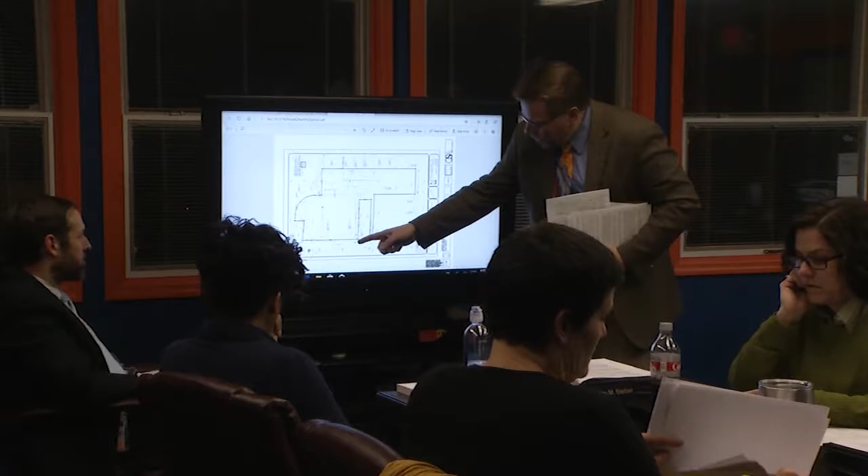Your property not only goes along Ewing Street, it comes up here between the gym and Tony Scholar's property, and that big tree is on your property. I'm sorry, it's yours. And these other trees are on yours too. This is the fence line here.

So the fence extends from Tony's yard beyond into your property, because your property jogs down here and then back up.

He did that years ago when that was a brush pile and wasn't being maintained. He fenced it so he could make sure he'd just mow it when he was mowing. He knows that that's not his property. That's actually the area that floods when water runs off your lot. So he can't use it for much anyway.

That's a low spot. The alley that runs between Scholars and McClovick's. Right now, every indication is that belongs to the school board. Wow. Okay?

It looks like this fence right here. David's fence is just a little bit over the property line, but it's a rectangular fence with 90-degree corners. It's very minor. Right now, there's a lot of growth along here anyway.

That's about where we expected it to be, but as you're running back along the east side, all of the properties over here, most of them, their deeds say they're 100 feet deep, which puts their backyards right along that line. But your property line, according to your deed, is here. That creates a no man's land that nobody's quite sure if it's owned by anyone.

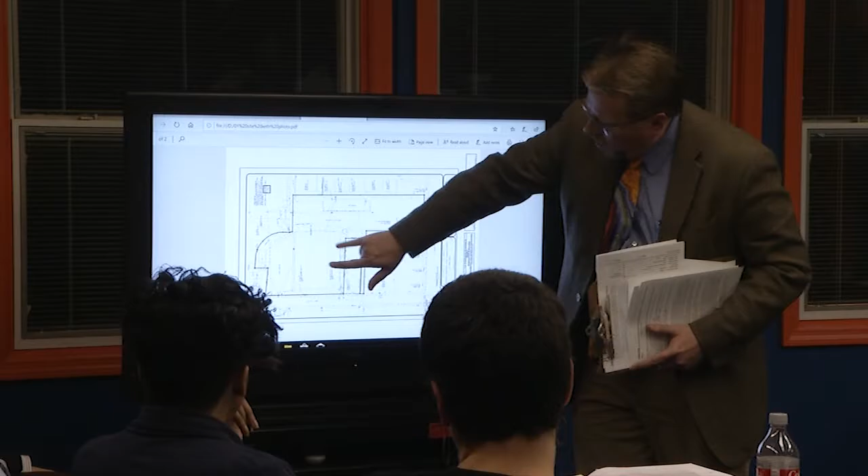Welcome to historic South Frankfort. Originally, 3rd Street ran through here and would have connected to where Ewing Court is now. This was 2 lots facing 3rd Street. There's a lot of history that Harry had to read through a lot of documents to piece this together.

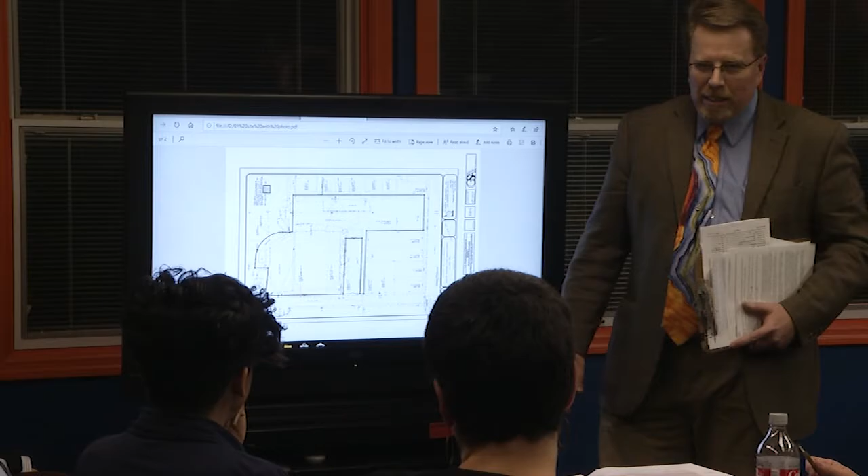Right now, we believe this is your property. You will see multiple fences coming out onto your property. We can clean some of that up if we have the money to do all of the site development, which I'm hoping we can tweak in here. But you'll also see this is the fence at the back of your bus lot, right there. Your property line is back here. So if you want to keep that as a wild green wall that helps separate your buses from your neighbors, that's fine, but you need to know that it's your wild green wall, okay?

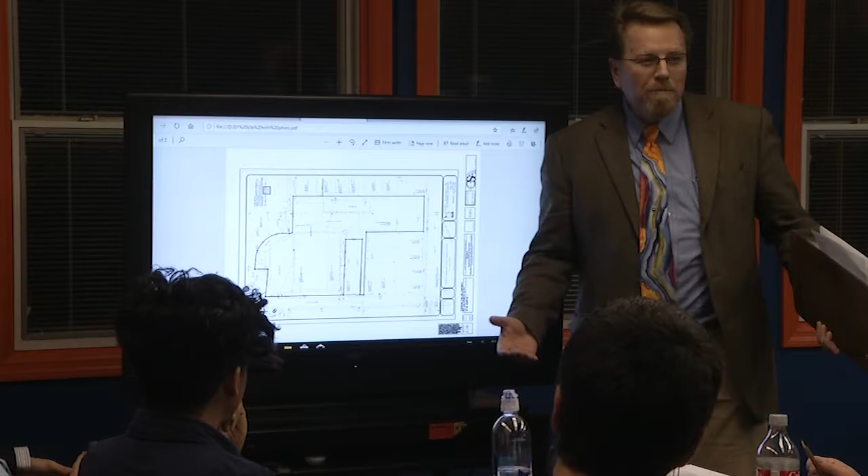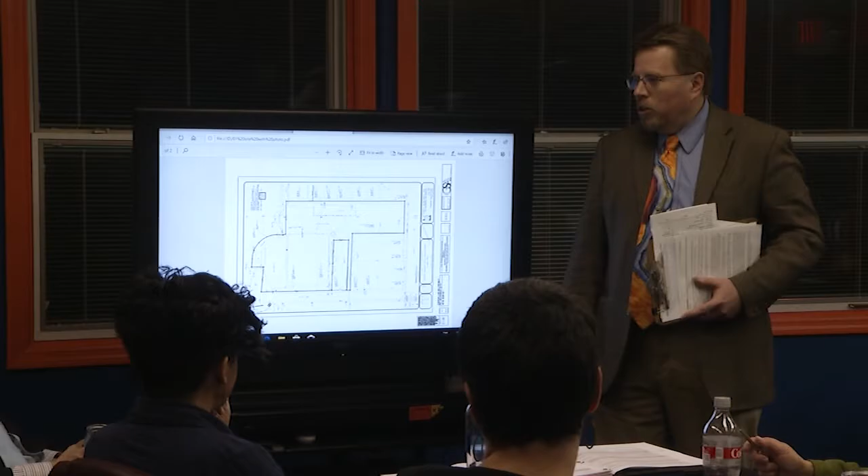Now you can know that. Before, I don't know that anybody knew where your property lines were. It's really hard to know what property to maintain when you don't know you own it. I don't think you're going to have any trouble. Your neighbors are going to keep maintaining this as they have for the last however many decades, and they're going to keep parking there. That's okay, except on game night - you can kick them out.

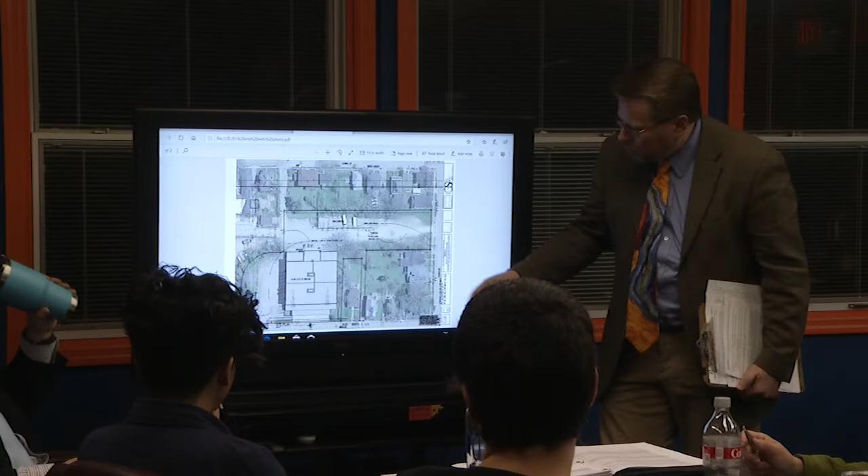Okay, so can you slide to the next photo just for a second? This makes that a little bit clearer. I overlaid it with a Google Earth image just so you can start to see - the property line doesn't show where the houses are for each of those properties. You can see Dave Stumbo's house is pretty close to this line. Of course, Tony's and Greg's houses are right there on the line.

This house is fairly close, but you've got large backyards here. That's what makes this a better space to park your buses - you're not starting them up at 4 a.m. on a winter day right next to somebody's bedroom window. And that's also one good argument for having your kind of green wall there. It gives some privacy to those folks.

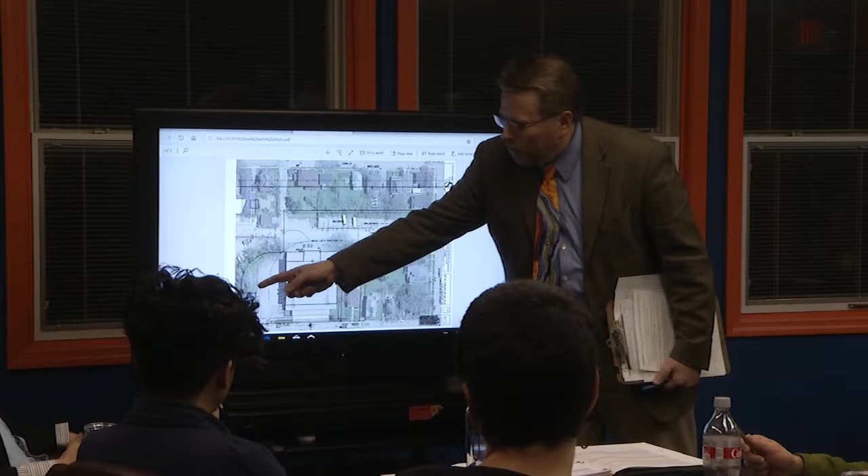Okay, and yes, this really is an odd curve that comes around through here to catch - was that the old music building at one point? I've heard it called Frisky, I've heard it called many things. And of course, this is Whitehead Hancock's property, and this is the city's property with the pump house. So that kind of gives you a quick overlay of what we've discovered.

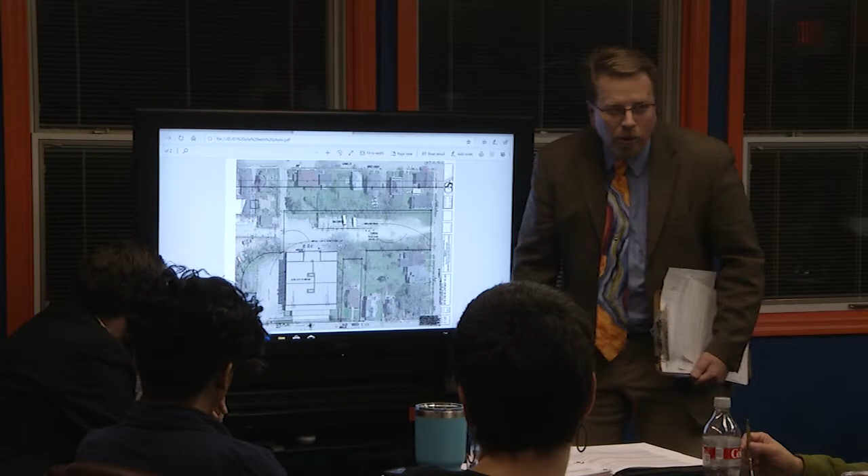I'm not sure what that line is for. I do know we dug up a manhole here that was completely buried in asphalt - that's the one that we found. It looks like all of the sewers on this side of the building are coming out to a manhole here, and the restrooms on this side are coming out to a manhole there. But there is also a sewer line that runs back here, downhill away from the building.

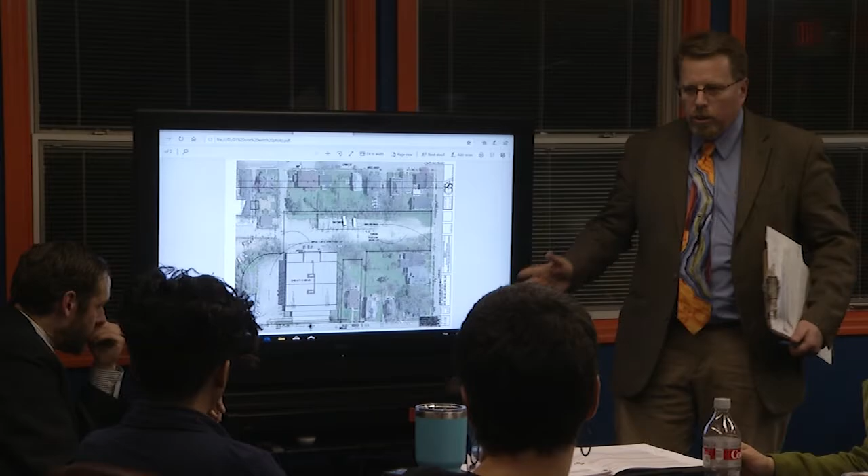So it's fun, and now we know where the storm sewers are in your back parking lot and have those located as well. We got out there one day with - trying to think who we were out there with - we were out there with Mr. Hancock and his crew, and walked around and looked at what work they'd done there in the last 2 decades.

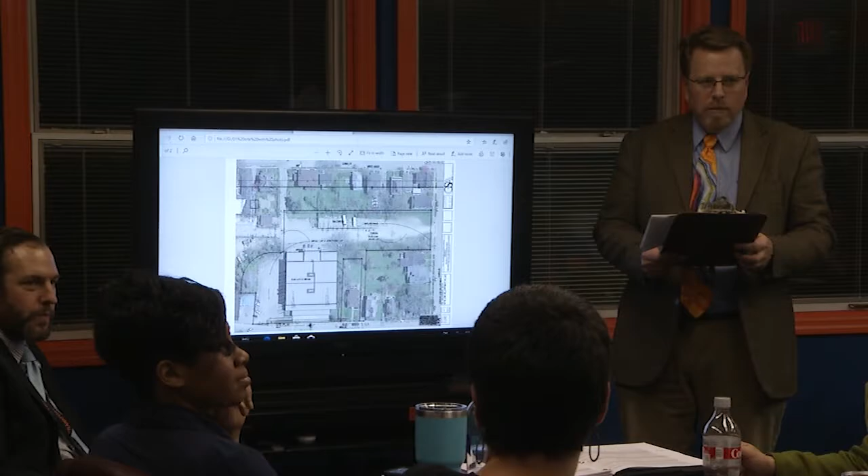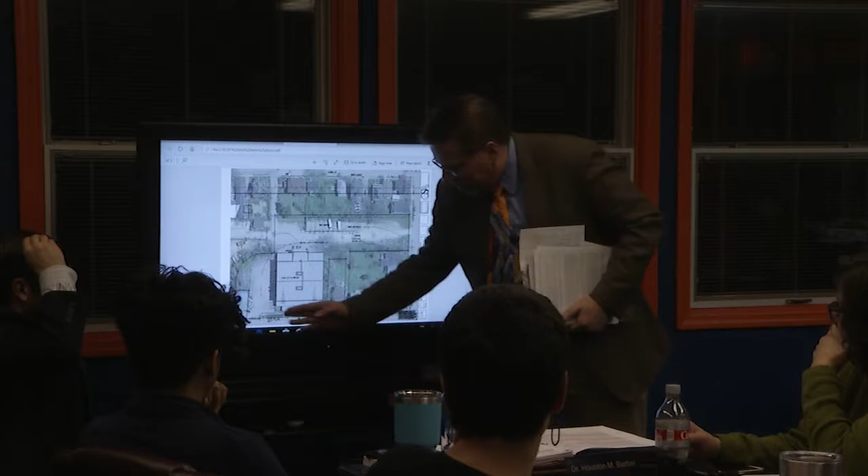City - you're talking about a large city sewer? You have city sewers, you have some that are your own, but yes, it's really kind of odd because these all went in long before anybody had easements. So yes, this is a city sewer line out here on the front. This storm sewer line, I'm not sure if that's yours or the city's. It's just catching your storm water and then it's dumping it off site. So that is very likely a city sewer, but since it's all on your project, it's a storm sewer.

It's storm, okay. But this is Frankfort - you don't have a separate... that's storm, true, they're combined. Yes, storm and sanitary are usually combined. But this has the big catch basins that are in your parking lot, and it's draining your parking lot, and that's all that I know of that's going into it. They're still running cameras - there's a separate project going on where the city is trying to have cameras run through all of these and map them because they didn't know where they were. That's how we actually found this manhole up here.

There was a flag there, painted with a mark, but it wasn't something the city sewer guys had done in preparation for our meeting, or that Harry had marked. It was the other crew doing that, so the city checked with them, and when they ran the camera through, they'd seen there was a manhole there. So there's coordination happening by necessity, which is good.

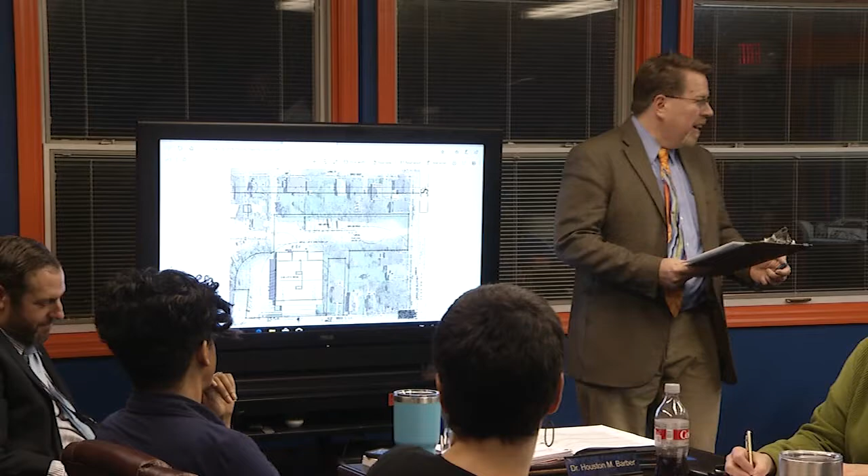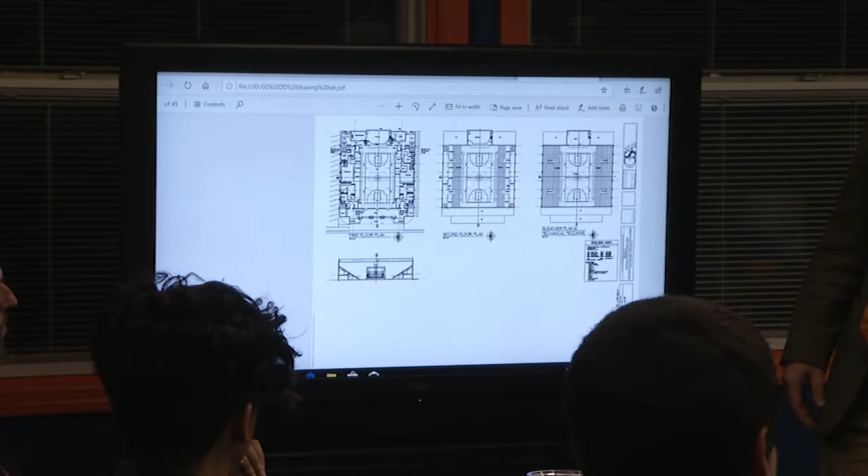Okay, can you pop me over to number 2? Now, you guys probably don't want to look at all 45 pages on here, but if we jump ahead a few, Catherine, let's... Life safety plan, that's what goes to housing building construction. It'll have all the calculations for egress on it. Next, please.

Then you're into the site survey. On beyond that, you'll get into my demolition plan, showing all the things that we're taking out of the building.

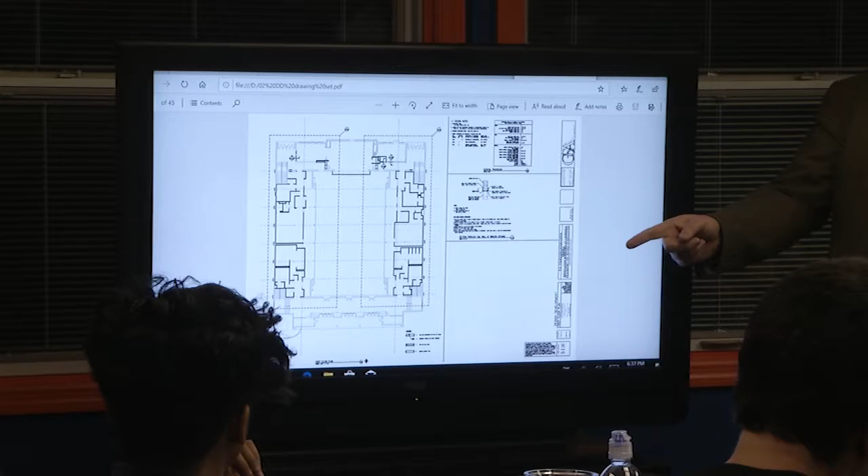And with that, well, this is actually a structural plan. I forgot, those weren't in the set I sent you. Those came in since the stuff I sent you this morning. I told you it's a snapshot of a moment in time - the moment's changed. So this is a structural drawing. I've got 2 pages of structural documents in here right now, and we rotated them in order to fit them on this page at a larger scale.

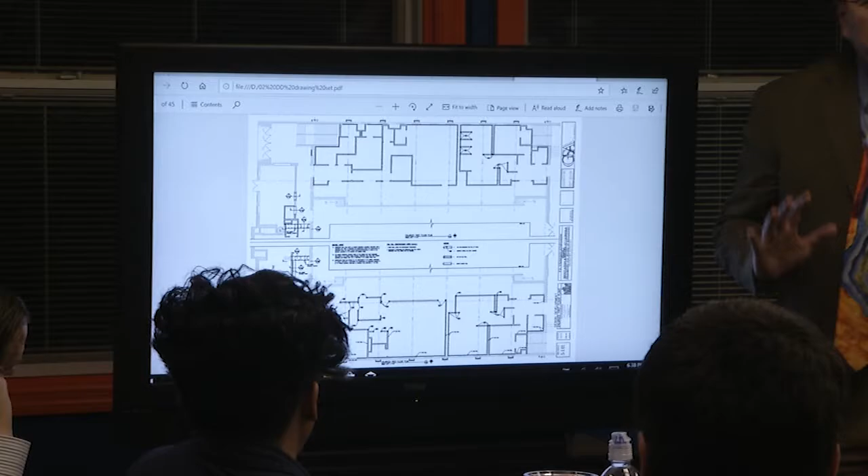Department of Education requires that bathrooms and things like that be at 1/4-inch scale on a page, and they want to see that we've gotten that far by the time we get to design development. The only way to get the entire side of the building on here is to rotate it 90 degrees or do it in little segments. It's a whole lot more clear for a contractor if they can see the whole side under the bleachers in one drawing. Okay, next should be demolition.

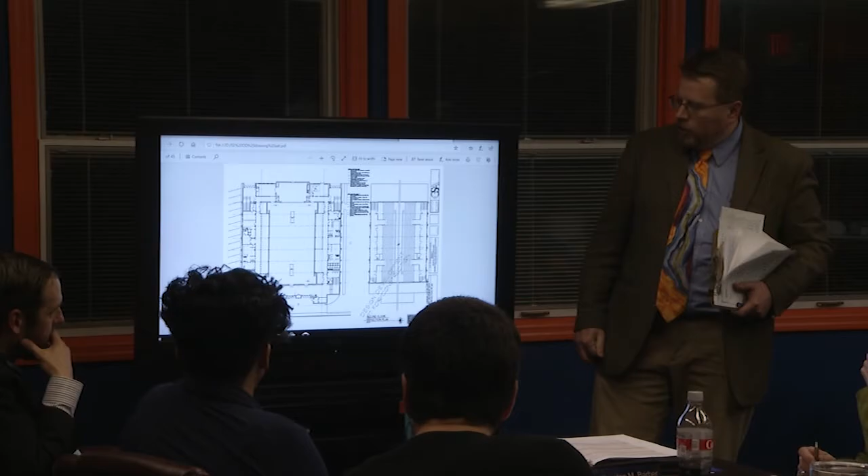So this is the dash lines of all the things we're tearing out. And then you get into the new construction. There are basically 3 floor plans - you know your base floor.

Yeah, next please. Which has all of your new layout below, as we discussed last time. Little tweaks as I'm getting dimensions to work out in a little more detail. I went back and did some field dimensions here to get those windows located. Next page.

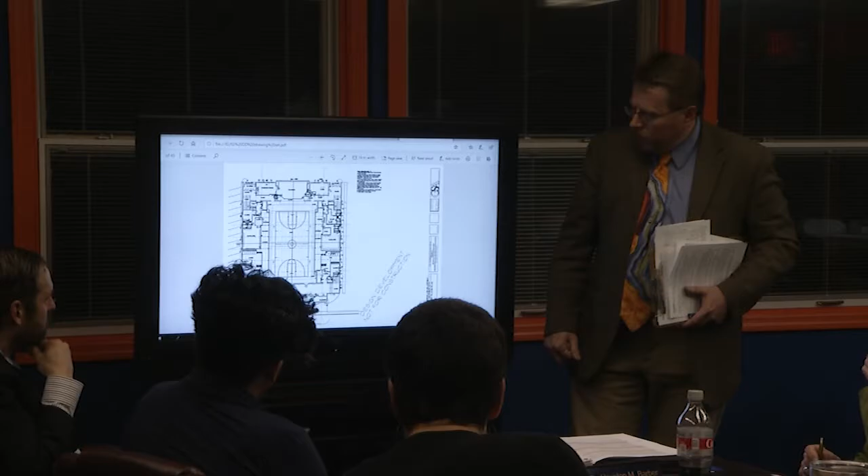Your corridors on the upper floor. We're going to have some mechanical coming down through these from the triangular space that is above the hallway and those rooms, which I can show you here in a minute.

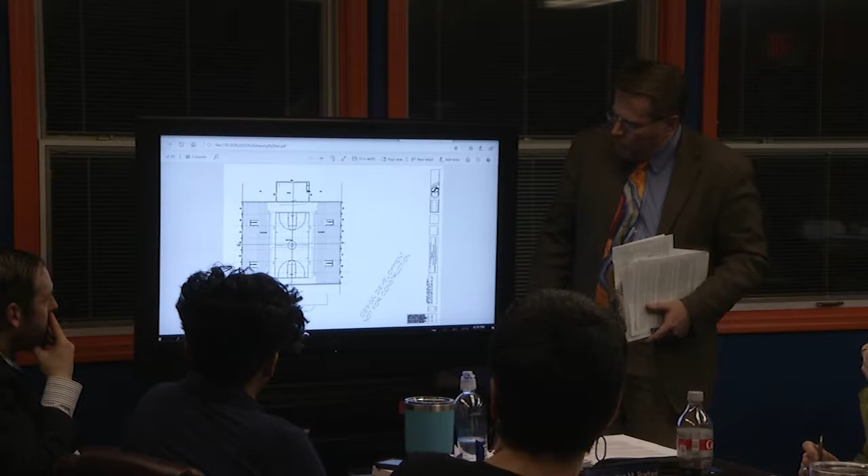Next, please. And then you have the bleachers themselves, the full gym floor. This is the view if you were at the ceiling looking down. The most relevant piece here is you're actually going to find the mezzanine that's above your stage in this. We're going to end up with mechanical equipment sitting out here on these roofs, so that's going to help serve all the spaces under the bleachers. Not on the front roofs, on the back roofs.

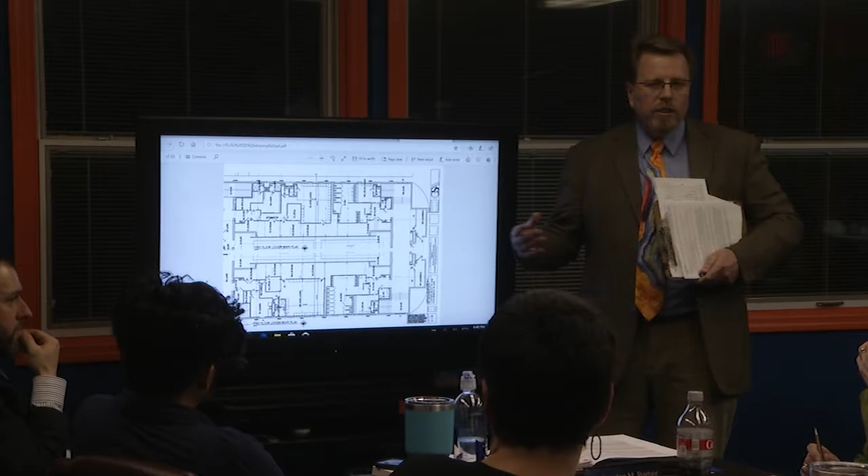Okay, and of course a roof plan is the other part of my plan drawings. Next, please. Told you we've done enlarged drawings so we can start putting dimensions on. You can't dimension toilet stalls and toilet fixtures at 1/8 inch on a plan - it's completely illegible. So that's why you have to go up to 1/4 inch scale. They can't build it if you give them a drawing this big. Next, please.

Okay, we need a 1/4 inch layout for all the gym floor because we'll have to dimension all the lines on there as well. You dimension the overall court, but you have to dimension where each practice court falls in between. So that is your larger court that you'd requested. Next.

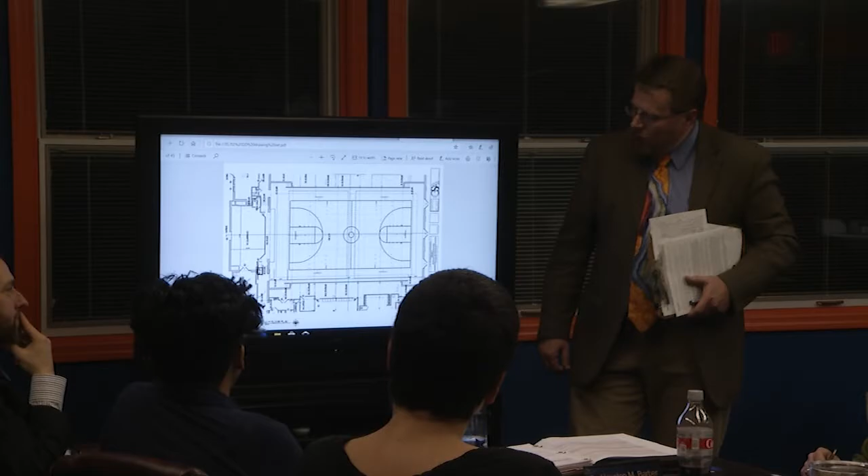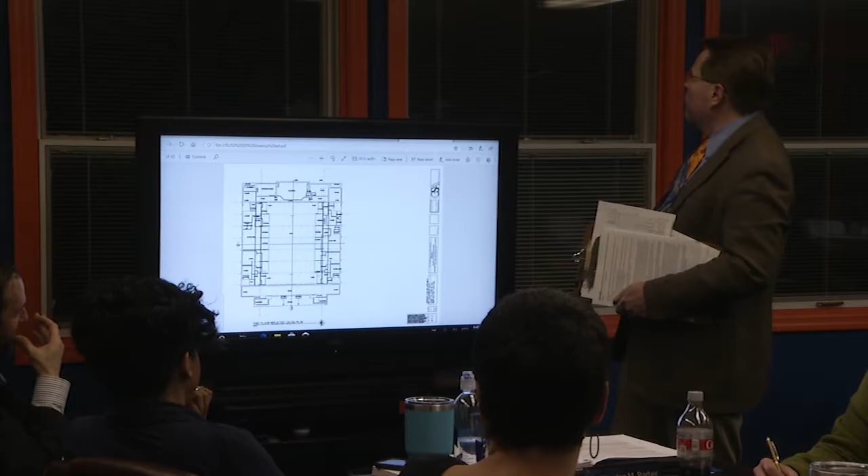There will be reflected ceiling plans for all of these because we'll have to coordinate lights, diffusers, everything that's going on the ceiling - speakers, horn strobes, anything like that will all go on this plan. So at this point, it's just the drawings of the spaces. Go ahead and flip through a couple of these next, because it's for each floor. We located where all your existing stuff is, so at least I have that to start with. Next.

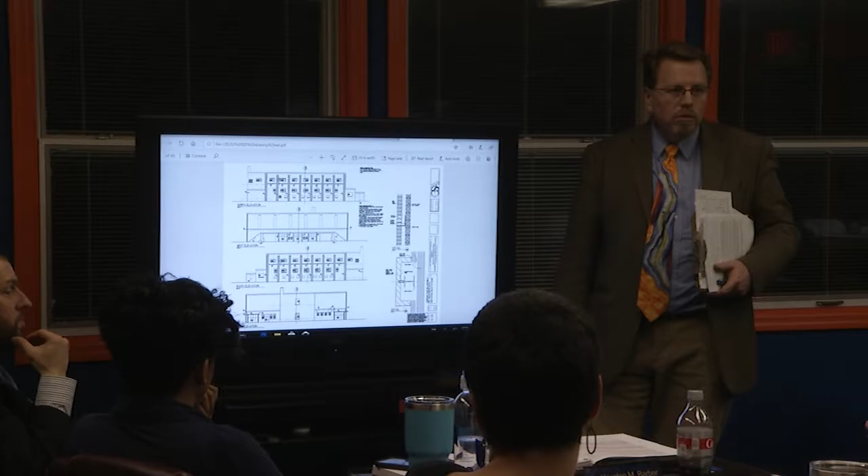Elevations, showing that we're repairing the piers, replacing the windows, repairing cracks. I have not yet done signage to cover these, but that's going to be the most attractive thing we can do on a budget. You can't jack the wall back up, it's sitting on sand. But we can fix the cracks so there isn't air and water coming in and out of your building. And then these are actually some primary places that you can put banners, signage. Branding is important now - I know all the districts are going to that. Okay, next please.

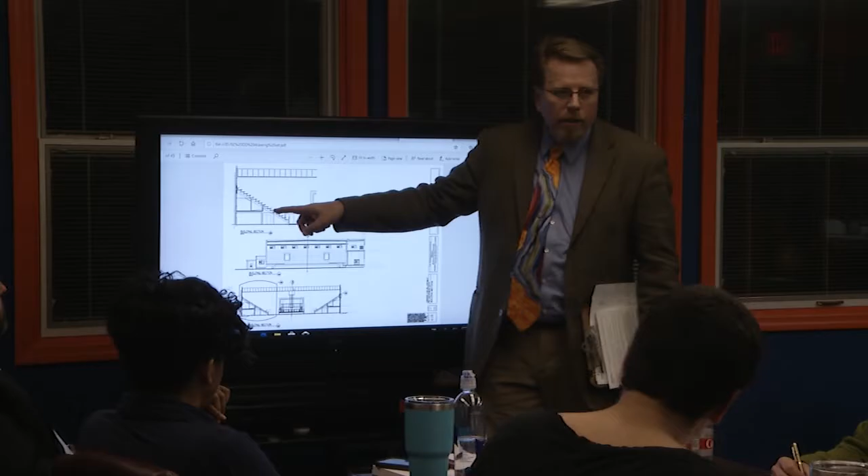So in the sections, if you slice the building and look at the bleachers, this is enlarged. You have locker rooms down below, and then upstairs you have this hallway with little storage rooms and then the ramp that comes down out into the bleachers. Above this hallway is a prime location for me to run ductwork.

Now you may remember there are some beams that run diagonal. They're supporting your bleachers, but you see them in the hallway. Some of them are wider than others because there's already piping beside them. We're going to make some of them a little wider that aren't wide now, and we're going to run duct runs from up in here down into these spaces, and then we can drop into the storage rooms down here.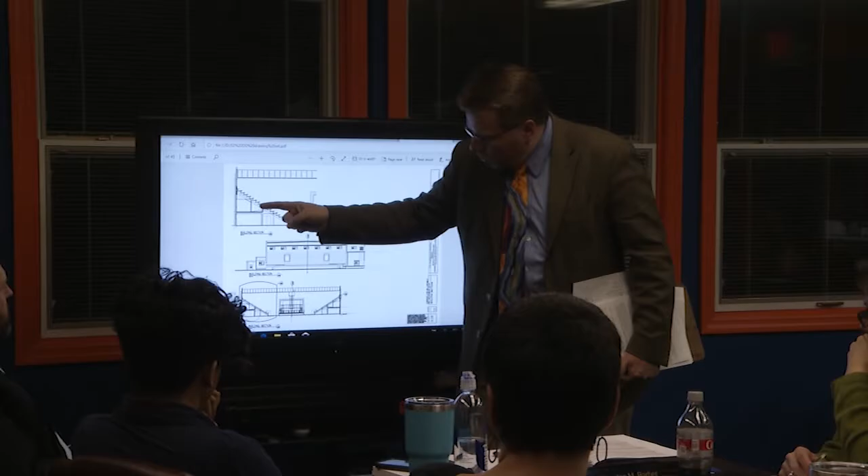Right now, you have ductwork laying on the floors of these storage rooms already, so we're not really taking up additional space there, other than if we have to set some equipment. But we're trying to get as much as we can up in here and then on the roofs in the back.

Okay, gymnasium. HVAC for the gymnasium: right now we're designing for air conditioning, ventilation, and heating for your support spaces. We're doing just heating and ventilation in the gym, with the ability to add air conditioning later.

But the estimate for the air conditioning units themselves for the gym, the additional equipment needed, is about $355,000, plus any structural modifications that we need to do. So that's probably about $380,000. And beyond that, our estimate of operating costs per year is about $28,000.

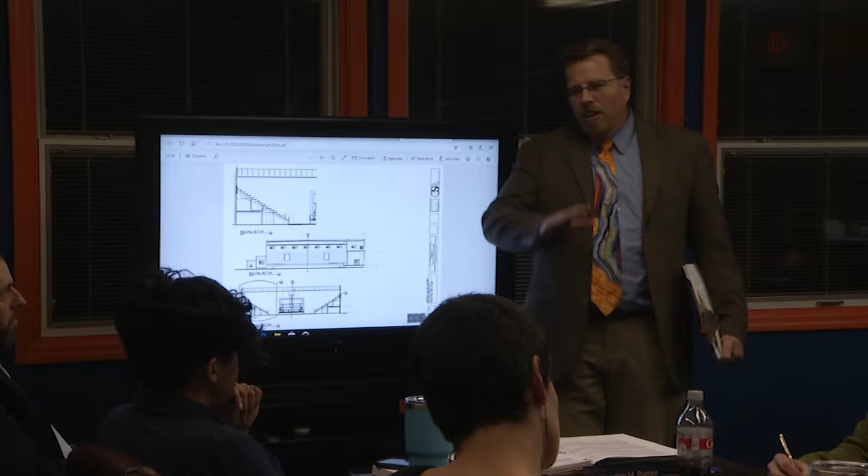And it's because you can't just run this part-time. If you just try to kick it on for the weekend—you've got a game Friday night or Saturday, let's kick it on, and the kids can suffer during PE, right? They've done it for years. Well, that is really hard on your wood floor, because your humidity is going up and down, up and down, and your floor is going to be wavier than the river.

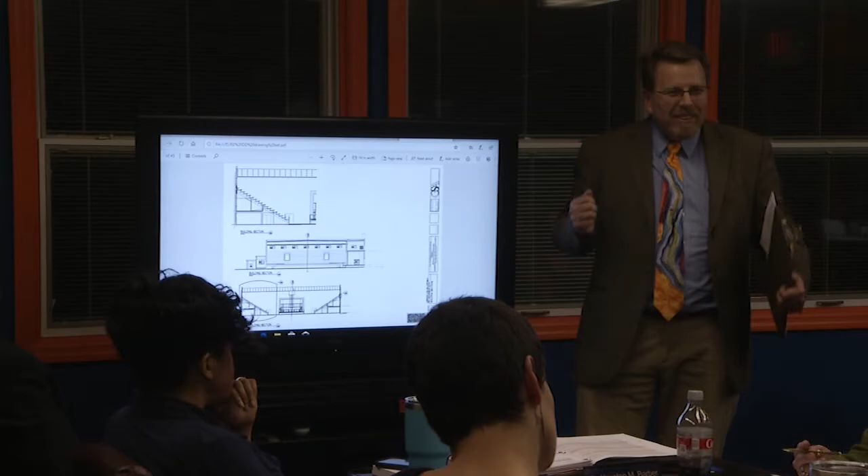So when you're ready to pull that trigger and put that funding in, it will be set up where you can add that. We're not designing a system that you can't add to.

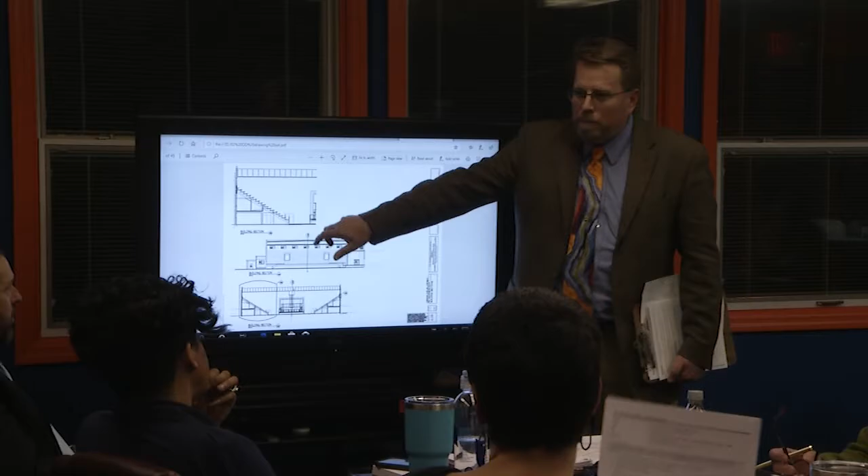One thing we are doing is improving all of your ventilation. Right now, you don't have it in any of your locker rooms. You used to, and there used to be much better ventilation in the gym itself, but the two rooftop fan systems have been closed off and covered with tarps because they were leaking water in through them onto your wood floor. So we'll refit and replace all of that and get you taken care of there.

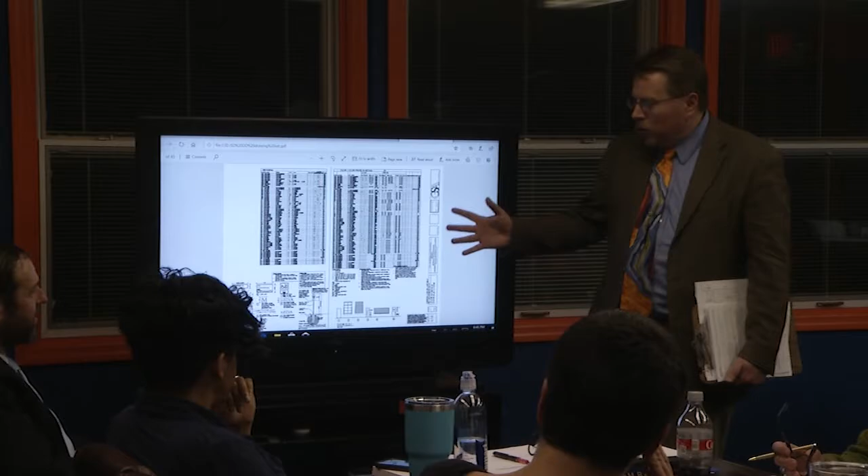Okay, next: door schedules, window schedules, those are things that are happening. I know you care about that—you do in the end because it makes your money come in better if people aren't guessing at it. But these are the level of things that we're getting to now.

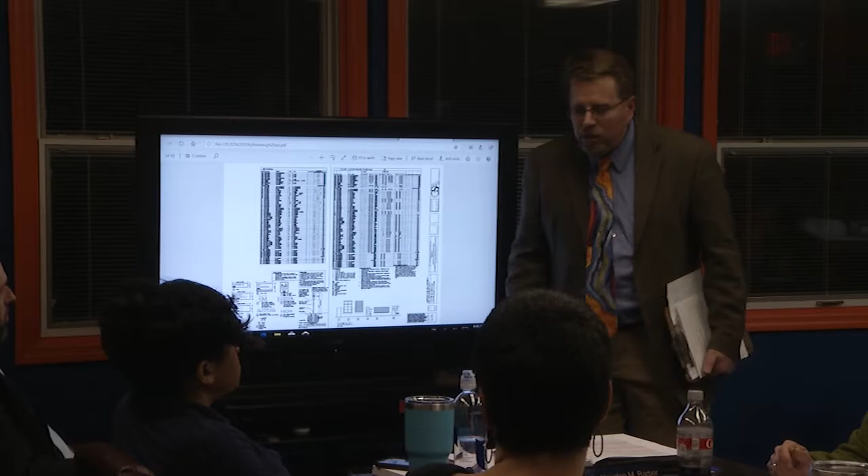Okay, beyond this, we're going to have mechanical, plumbing, electrical, and I'm guessing you guys don't want to go into that in great detail, but it's in the set and we're working through those levels as well. It's in the PDF that you guys got earlier today—that's the current standing on each of those. So the rest of those pages are here if you want to see this. Apparently it's 45 pages in this set right now. It will get bigger, there will be more pages of details, more pages with notes, but that's part of the process.

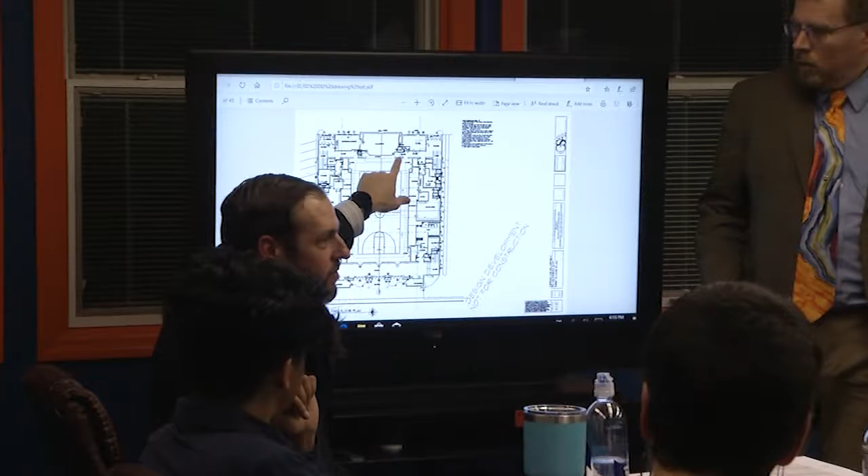You're saying not extend it out? I'm just trying to, I don't know how it would work, but I don't understand why we do this crazy thing instead of just doing it straight across. You don't gain that much space though, and significant square footage in a classroom.

If it's straight across there, the lift would still be out into the area. Yeah, the lift is still going to be here regardless. Yeah, how much space is that? If you cut this off, I don't know, I'd have to know the square footage. Actually, right now, I'm not even sure that the left and the right side align with each other.

Because I added a bathroom in on this side. That came about when we didn't want to have somebody who was seated here having to go down the lift and across the gym floor to get to the restrooms in the front. Plus, you've got a lot of people who work and stuff in the back side of the building.

So what's going on with the front down here? Down here, replacing doors, making the ticket windows operable again, taking out the walls that you can't get a cooler through in the concessions, replacing the sinks, making sure you have hot water in the concessions, and finishes. That's the bulk of what we need.

2 different ticket booths? You have 2 different ticket booths. I'm replacing all the windows in the building already. You have coiling overhead doors in those rooms, so there's really very little I can do to those spaces.